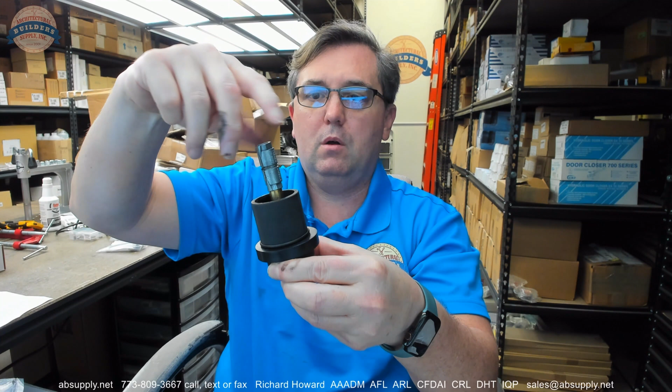There you go. So that bolt is buried down there. As you drill that 5/8 hole, you're certainly going to need to drill it, and having oil rubbed on my hand is certainly to be expected.

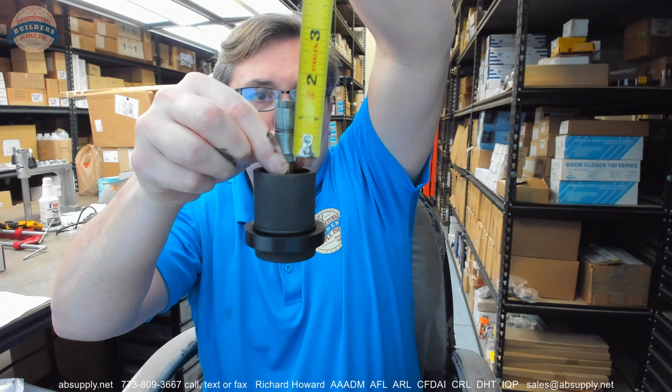From the bottom of the bolt, from the bottom of the washer, if I'm holding it upside down, looks like it's about 1 13/16. So you're going to need to drill that hole about 2 inches deep, and then you're going to insert all of that down into the hole, and then with your spanner wrench, you're going to tighten, and that's how that installation is going to occur. If you don't have adequate material to install that to, you'll obviously need to provide that.

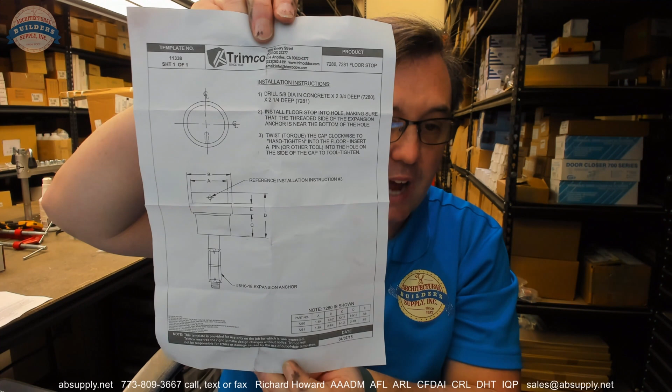This is quite clearly for a masonry style installation. This is going to include the installation instructions, and I would imagine that they are one of the supporting documents down below, so that's included. Let's take a look at the extended description of this item along with its supporting documents and make sure that we have all of our bases covered.

Now this is indeed the item that we're looking at here, and we have our extended description information. The extended description tells us that we're dealing with a fOCAL series. fOCAL is a subcategory of decorative hardware that Trimco has in their offering in their full line catalog, which we'll take a peek at in a moment. Designed with an architect's eye to deliver distinction to any project, visual appeal, etc. You can read about the hallmarks and the other important marketing aspects of the fOCAL line.

This is the dark bronze version, the oil rubbed bronze version, and the Trimco 7281 is indeed available in different finishes: 499 is a polished brass without lacquer, 605 is polished brass with lacquer, 606 is satin brass, 609 is antique brass, 610 is blackened satin brass - not antique, but darker than that. 611 is a beautiful finish you don't see often at all, polished bronze - I love that one. 612 is satin bronze, 613 is oil rubbed, 616 is blackened satin bronze, 619 is satin nickel, 620 is antique nickel.

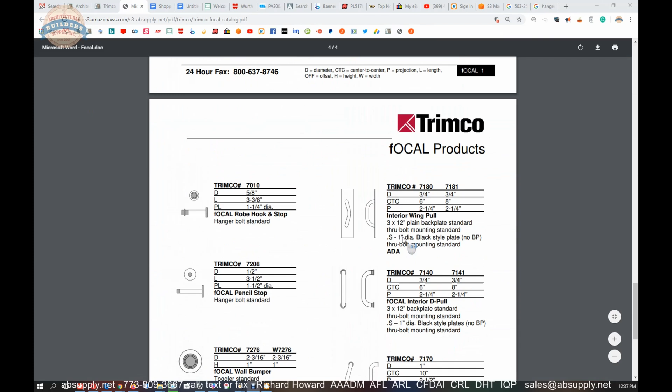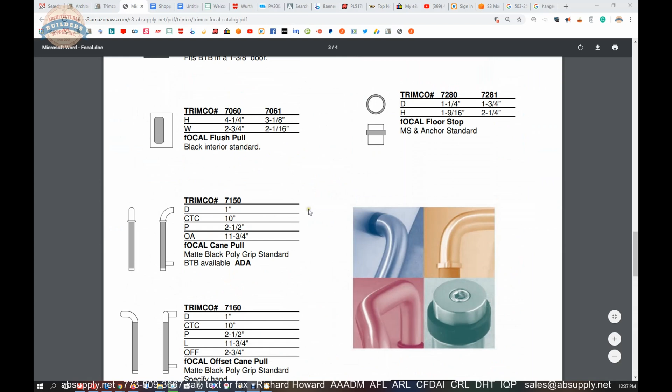A little bit about the designer. I've done some fOCAL material, and a variety of their designs are listed here, other door stops, door pulls. And I don't see the 72... yeah, here it is, 7281. So they basically make a smaller version of this as well, which is the 7280. Machine screw and anchor standard.

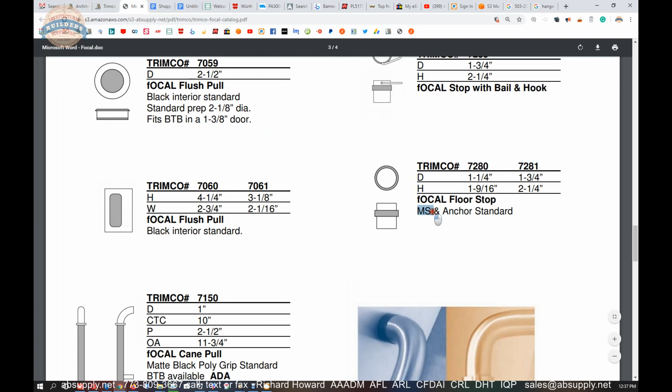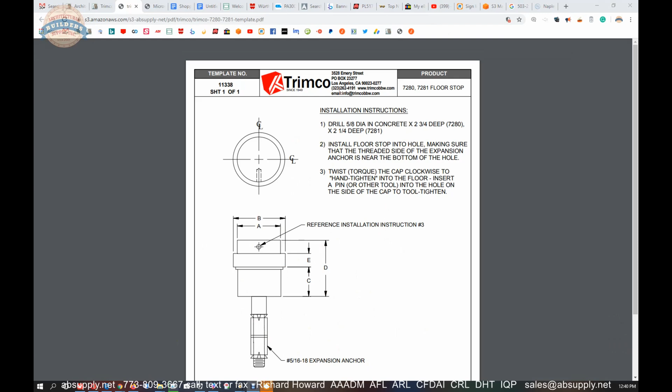Okay, so let's go on to the next document, which is the template, and that is the installation instruction that comes with the document. Now, as we study that document, we're going to see the installation instructions tell us to drill a 5/8 hole, 2 3/4 deep.

Yeah, I would say that you would not need quite that deep. I know I gave a dimension earlier, I'd say 2 1/2 would be adequate. Oh, forgive me, yeah, 2 1/4 deep, because we are dealing with the 7281. There we go, that makes sense.

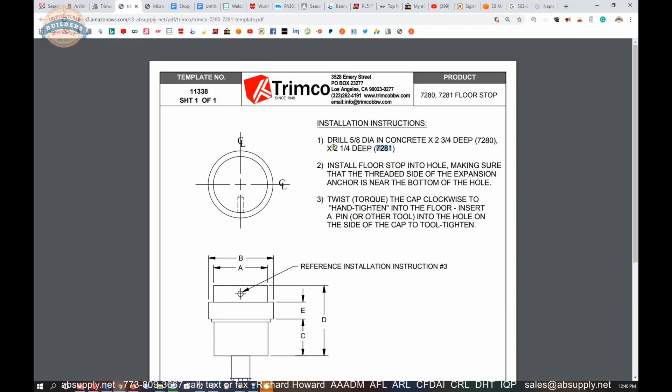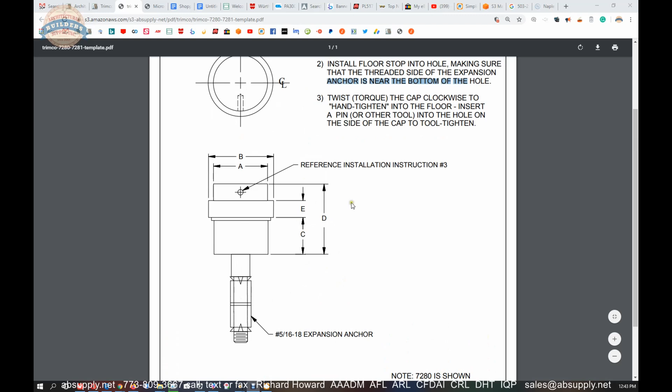2 1/4 inch deep. Install floor stop into hole, making sure that the threaded side of the expansion anchor is near the bottom of the hole, as shown. And they go on to apply letters to each of the parts we've gone over, but don't define them in the sense of giving their dimensional properties for each piece.

But as we scroll down, we do bump into it, so it's right here at the bottom, being mindful that they're showing the 7280.

Now after that, we're going to get to the product maintenance, and that's just a generic document that Trimco issues with all of their items. It talks about how to maintain brass and bronze and things of that nature, best practices when it comes to finish maintenance. That's very important when it comes to getting the best long-term result out of your investment in very high-quality commercial hardware.

10B is listed right here, you might want to review that. Then there's a link to the manufacturer's page, as I mentioned, and as we click on that, we'll be able to look at not only all of the Trimco products that we sell, but also a link to the manufacturer's website, as well as a link to that product catalog.

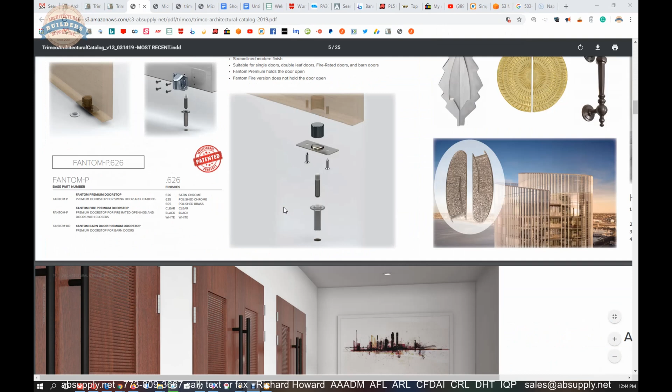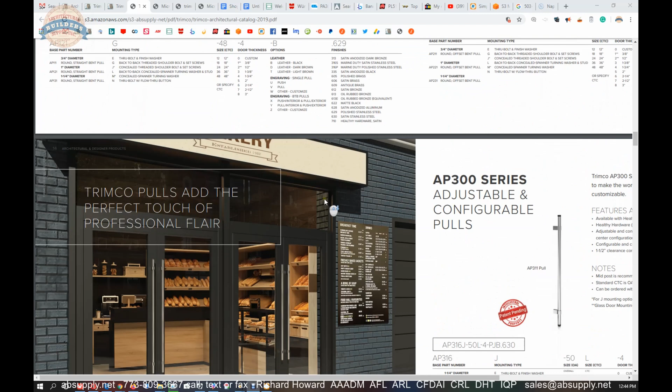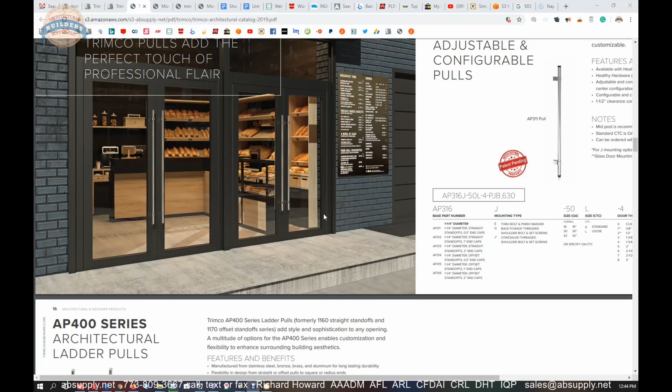And from there, you'll be able to review, again, all things Trimco, a variety of ever-evolving products from this manufacturer. They are a very high-quality manufacturer that really specializes in a feeling or sense of handcrafted products. I take material out of their packaging, and this stop is no exception. It literally feels like it went from the person's workspace who was putting the oil-rubbed process over it into the packaging, then to my hands.

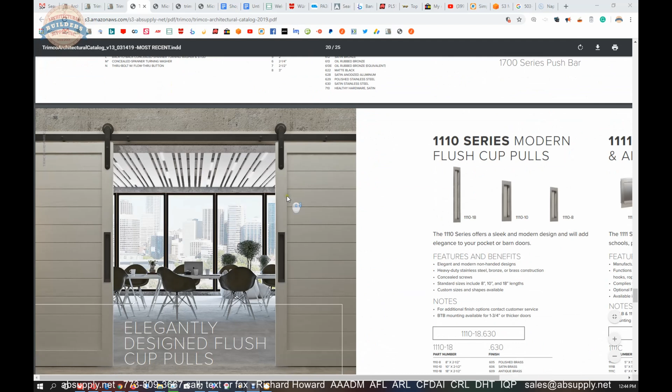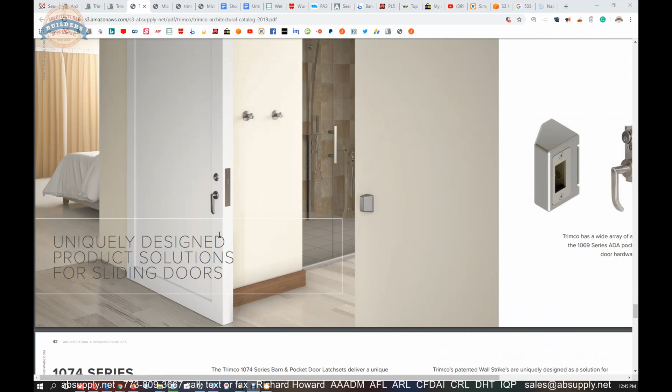So this catalog will allow you to review all things hardware from Trimco. Now, Trimco as a manufacturer, for me, I think of them as a very high-quality trim and auxiliary hardware manufacturer. They don't stock many things, although they do some, but their specialty really is very exceptionally high-quality fit and finish, unique solutions that in many cases only they have. As a manufacturer, their material is generally made to order. So while you might run into a situation of them not having something on hand ready to ship immediately, I can tell you their material is certainly always well worth the wait, but please do plan in advance. Let's finish up this video on camera.

Now, I'm hoping that it certainly comes through that I'm partial to Trimco, and it's because I am. I really am a firm believer in the very high-quality nature of their product line. Every time I get a product, I'm always very pleased with just how good it looks, is the bottom line. The initial reaction that you have to the quality of the finish. I've received solid brass, polished brass push bars from them in the past, and they literally still smell of the polish that was used during the manufacturing process.

If you're not familiar with Trimco, and many people aren't because they've always been a West Coast company, so if you're from the East Coast, they may not be the first name that you think of when it comes to trim and auxiliary hardware, but I would certainly encourage you to review their product line. Incredibly high quality. They are not going to compete when you're looking for the least expensive option, that's to be sure. But if you are looking for the best quality option, they need to be in your top 2 options, in my opinion.